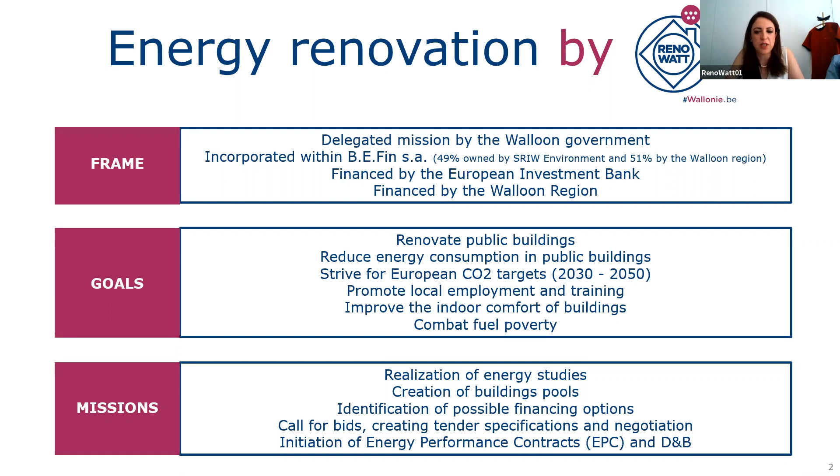Our missions are, thanks to our team, composed of engineers, architects, technicians, jurists, financial specialists, and administrative assistants, together with external officers, we carry out complete renovation studies, starting from building selection till signing energy performance and design and build contracts. We create building pools and identify possible financial options. We also create tender specifications and run the whole process of calling for bids and negotiating the different offers.

Renowatt, being a group purchasing organization, is a one-stop shop that plays the role of a public facilitator between the different parties and through all project steps. Local public authorities get access to our service by signing the adhesion convention.

Afterwards, we select buildings based on heating and power consumption, in addition to heated surface area. We look for funding opportunities, manage the purchasing process, and select the ESCOs, which are the energy service companies.

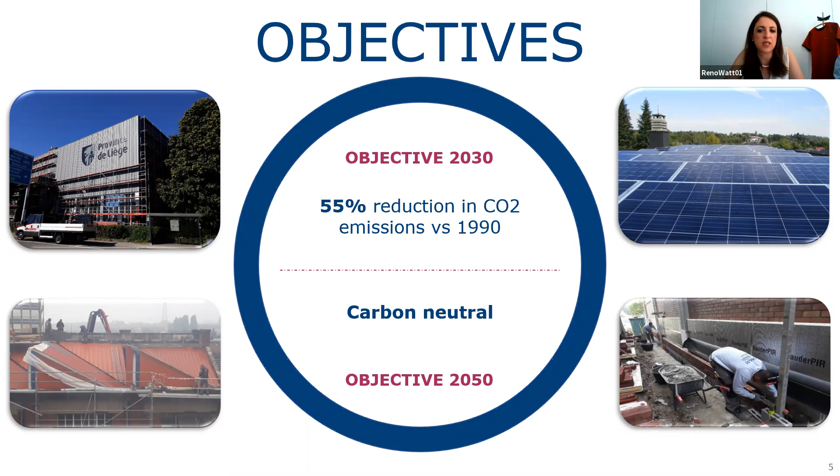Through the different projects on which we work, we try to abide by the European target of reducing carbon emissions by 55% and achieving carbon neutrality as much as possible. In fact, the initial goals of Renowatt have doubled from those initially planned in the contract with the European Investment Bank.

As seen in this table, instead of working on a project for 50 local public authorities, more than 113 local public authorities have joined Renowatt. Therefore, instead of aiming for 104 million euros of investment, we could achieve up to 225 million euros of investment.

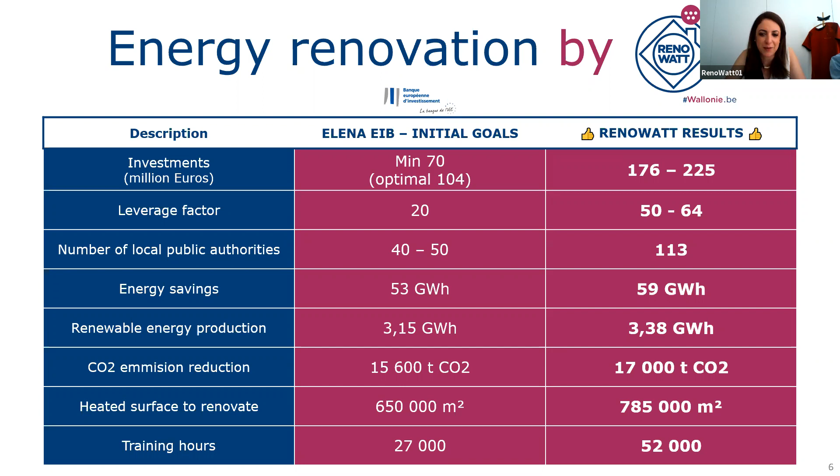I will give the speech to Luc Charlier, and I will be back for the questions.

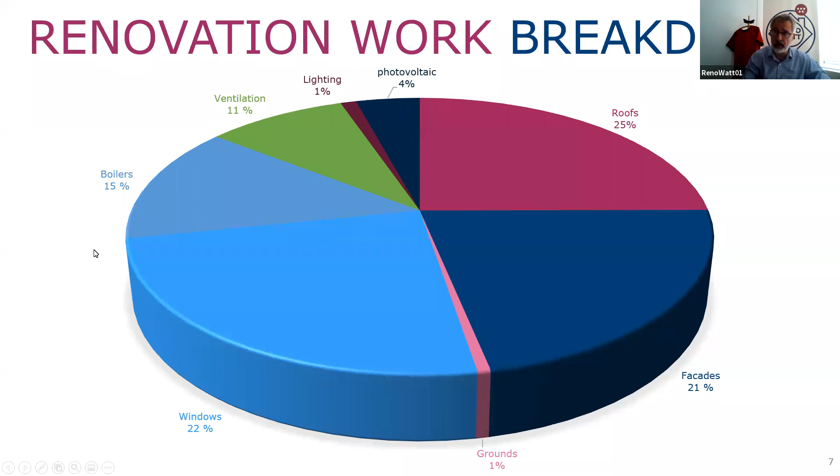Okay. Thank you. Hello. So here you see the type of renovations we do in the buildings. This means we work on the envelope with windows, grounds, facades, roofs, etc. And we work also on systems: boilers, ventilation, lighting, photovoltaics. This means 2/3 of the work is done on envelopes of the buildings.

What is our process? So our process is divided into 6 steps, as shown here. I'm going to go into the 6 detailed steps during the next slides. So first, we make an energy list of the buildings based on global data, which means consumptions and heated square meters of buildings. We have global data, but also more detailed data.

How does it work? Practically, we are going to divide the buildings into 3 categories. First category, buildings with high consumption and high heated surface. And of course, we start with the biggest buildings because we have a lot to do, and there are, of course, more energy gains in this first category.

But we are also going to look at big buildings with lower consumptions. It could be interesting because we could work on system actions like improving regulation, for example. And we do not have to avoid looking at smaller buildings if they have high consumptions, because on small buildings with high consumptions, we of course need to insulate and to work on systems.

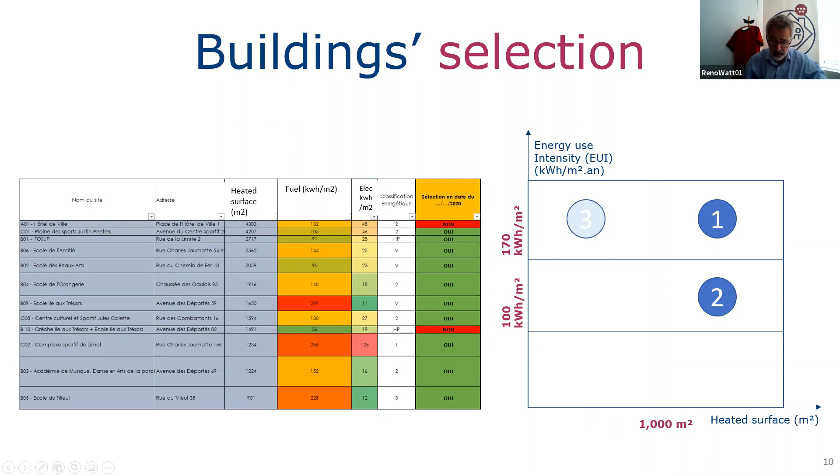This is about global data. Of course, we need to go into more detailed information about previous renovations and all detailed information about the buildings. If we look at the quick scan, what is it? The quick scan is one way to say we do energy audits and analysis.

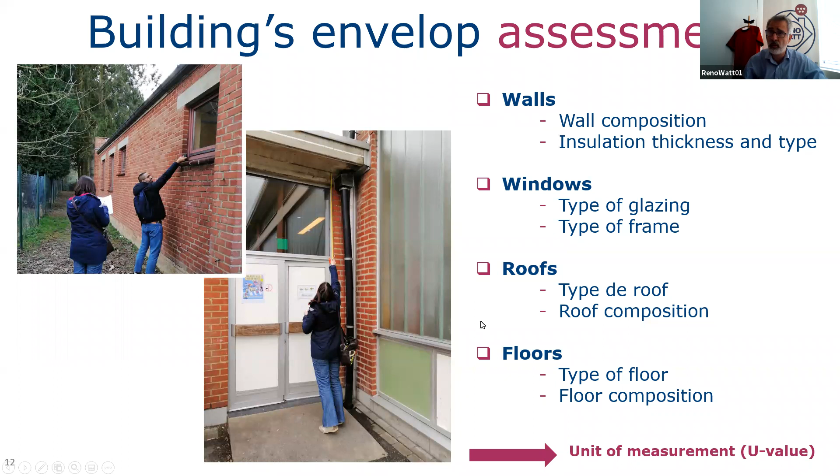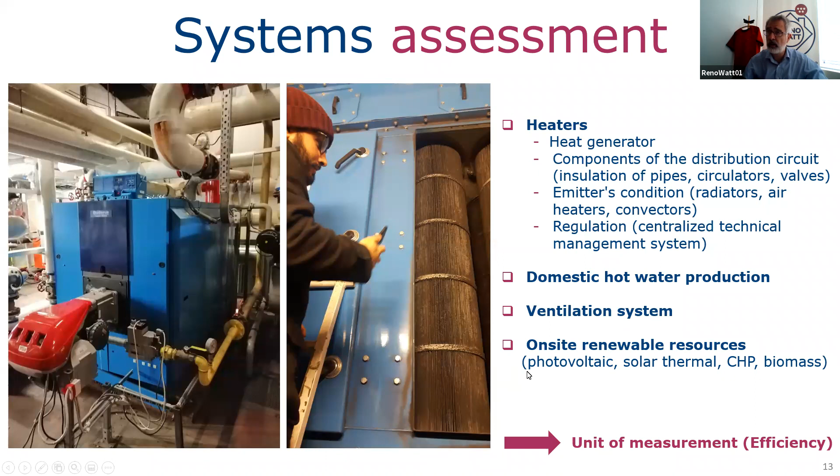So this means we are going to visit the building, check walls, windows, roofs, floor, check systems, of course, heaters, heat generators, water production, ventilation, renewable resources on site. And based on the real building, we are going to make a 3D model because we need to have the proper value of the surfaces.

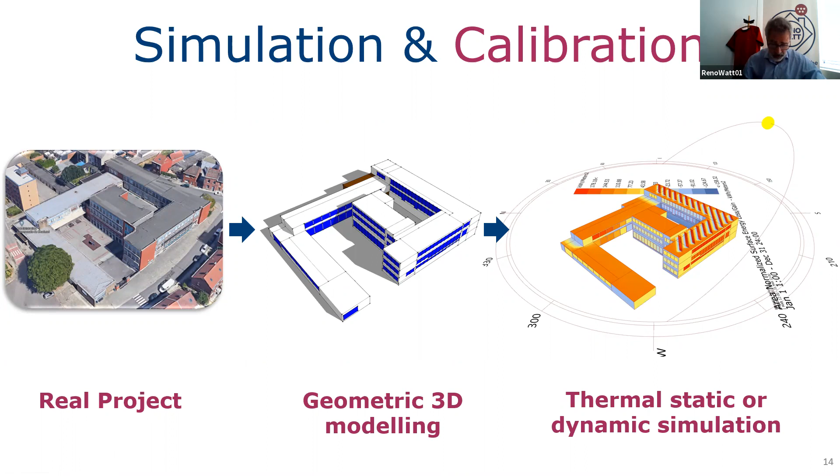We are going to add to each surface the U value, which means the thermal properties of the surfaces, and we are going to simulate the building. Static or dynamic simulation. So when we have a model based on the real consumption and on real temperature in the building, then we are going to be able to calculate how much energy we can gain on the building. So first we calibrate the building.

Why? It's just a way to be able to give a good approximation of the gains. So first calibration and then calculation of gains and costs of improvements.

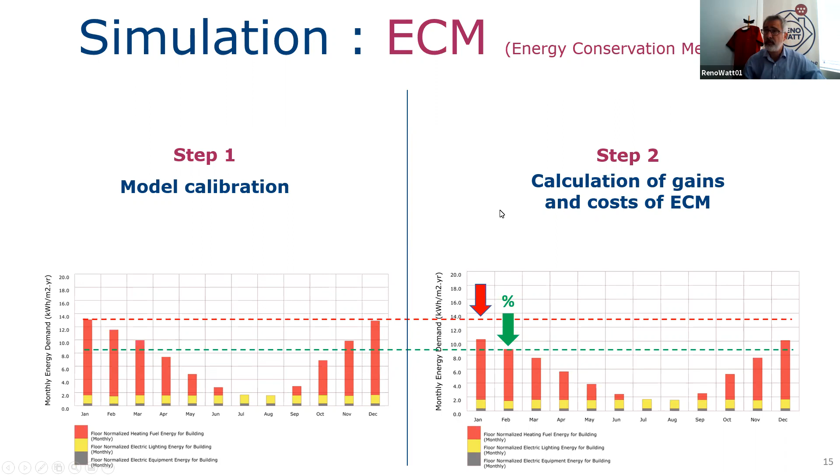What is important also is not only to follow consumption, but to follow and understand temperature in the buildings. So we use the Internet of Things. We place sensors which transfer the temperature in the building every hour. And this gives us a simple way to understand how the building works. So you can see, for example, the decrease of temperature during the night and then during the weekend. And this is important for understanding, of course, whether it's regulated properly or not.

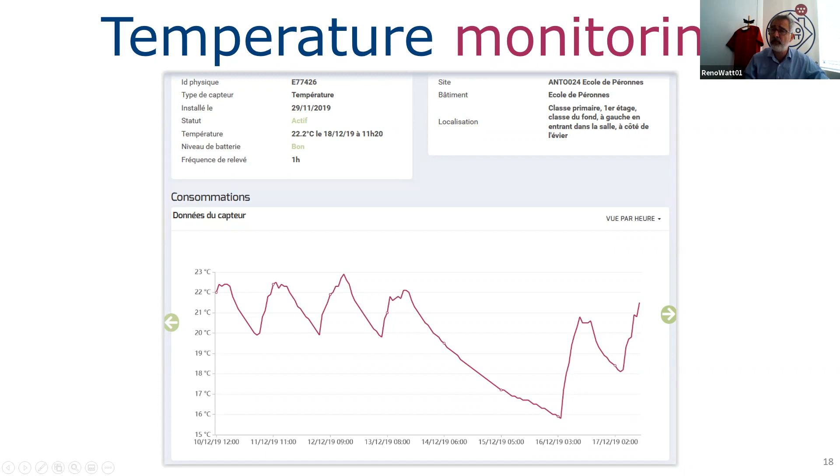We have also a way to calculate the improvement in agreement with M&V, measurement and verification standards, as described by EVO, which is the Efficiency Valuation Organization. We have simple calculation opportunities, just a way to reduce cost of energy, gains year to year.

About financial analysis, step 4. So first we are able to calculate technical gains, and then we transfer technical gains into cost calculations. What do we do? We have the list, of course, of all actions with the cost of each action. We could have, depending on the buildings, big complete actions or smaller actions. We have different options by building. We propose different scenarios to the public sector, so they are able to choose what they want between different proposals.

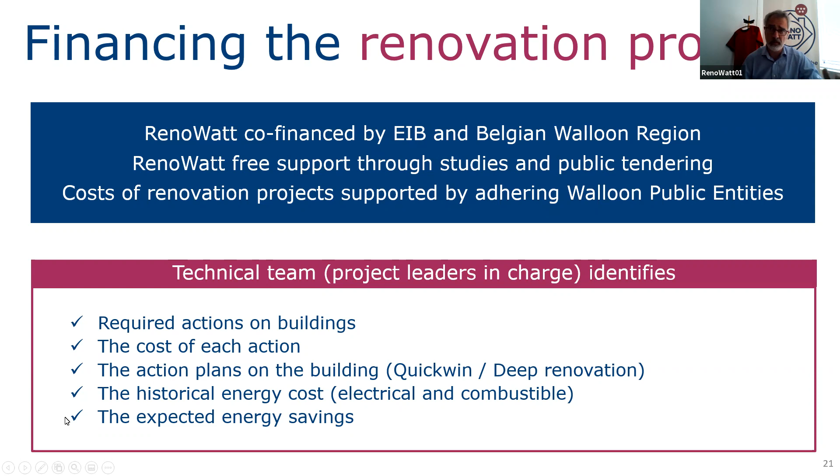We take into account the historical energy cost of the buildings, and we are able to calculate the energy savings compared to the historical costs. So on one side we have the global budget, we have the cost of each action, and we calculate cash flow even on a 20 or 30 year calculation. We have the net present value analysis per site or globally per local authority.

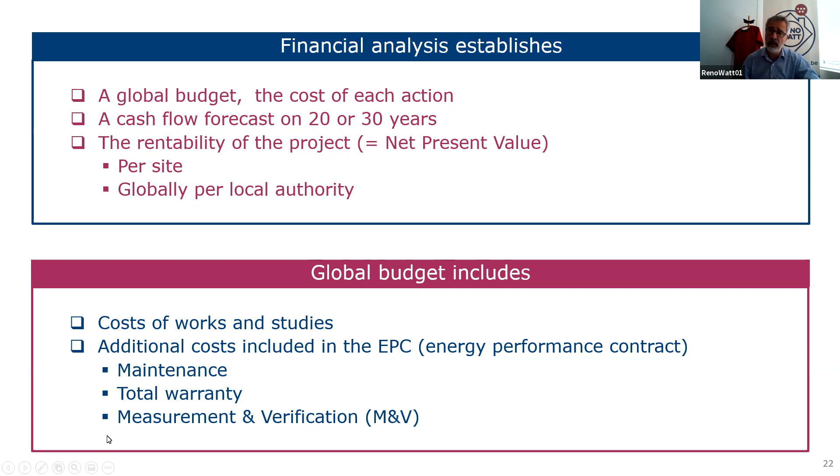Global budgets include costs of works and studies. Not only cost of works, but we have to take care about additional costs which are to be taken into account in the EPC contract, the energy performance contract, because in this contract there are the works, the studies, but also the maintenance, the total warranty, and the cost of measurement and verification, which are typically taken by the ESCO.

So in the financial analysis process, we have the yearly costs. Works are financed by classical bank financing over 15, 20, or 30 years. Yearly costs, yearly gains, comparison between costs and gains. This is practically standard financial analysis. And evolution of cash flow for the public authorities. Of course, we take care about inflation, and how the cost of fuel, electricity, wood, etc. is going to change year by year. And based on the project, we calculate the improvement of cost during 20 or 30 years.

So what is going to happen? This means, based on the project, if we have more insulation or more systems, the energy gains are going to cover between 30% and 40% of the global investment cost.

So practically, of course, there are constraints and difficulties, and there are advantages and opportunities. Constraints and difficulties: public authorities have low budgets, self-financing is impossible, strong dependence on public subsidies, additional costs involved in the EPC contract, this is maintenance and M&V calculation. It's not easy to compare historical and future maintenance costs because of a lack of information on actual historical costs in authorities.

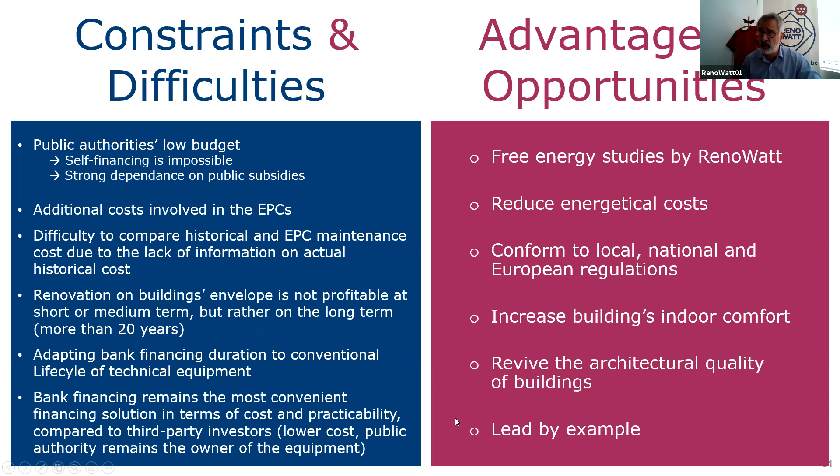About opportunities, the free energy studies by RenoWatt helps the public sector to go ahead. The reduction of energy costs helps global finances. We conform to local, national, and European regulations. We increase the buildings' indoor comfort. We must not forget the increase of heat during the summer. This means we go to more comfort in the summer, more ventilation in the building. We, of course, go for architectural quality improvements, not only energy improvements. And we have to lead by example to show the way to citizens.

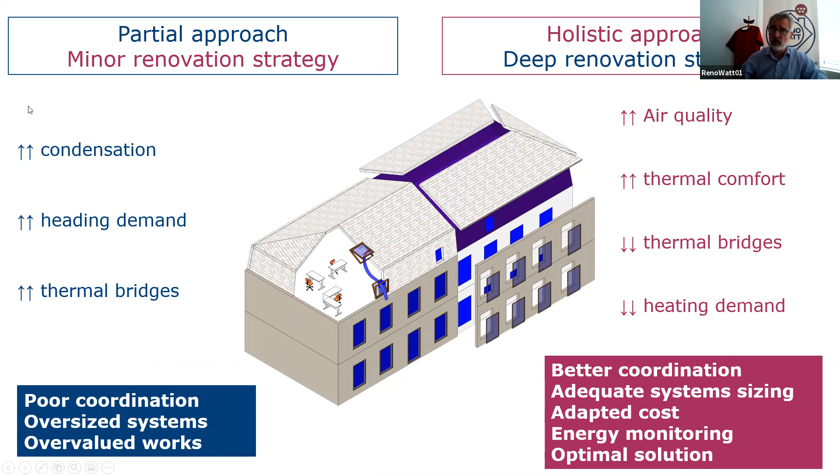Step 5, we have customized solutions for each building. So first we propose different scenarios, and then we have to go to a customized solution. Practically, having a global strategy for the building is the best way to do it. Sometimes we also have to do minor renovation, but we have to take care about being in lock-in situations. So the best way is to check the building globally.

So about guidelines, we are going to work on, in Belgium, PEB requirements. This means for the envelope, 0.24 to 0.15 watts per square meter Kelvin. We propose mineral or bio-based sustainable materials.

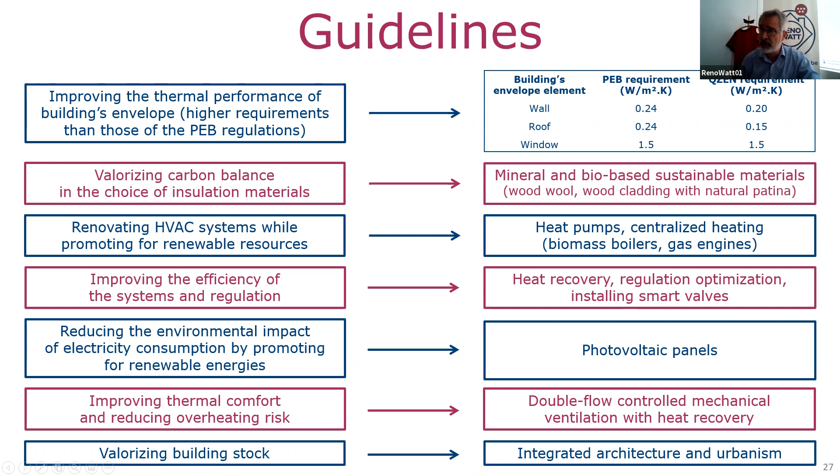We propose heat pumps, centralized heating, biomass boilers, gas engines, all systems which can help reduce CO2, improving the efficiency of the systems and regulation, good gains, photovoltaic panels, and it's important to speak about improvement of ventilation, especially with the coronavirus situation. And of course, integrated architecture and urbanism. So not only energy.

At this time, we are at a step where we are going to launch the contracts. And what do we do? Practically, we launch different types of contracts. So why? Because it's linked to the dimension of the building. So big buildings with big energetic gains, we are going to run long EPC contracts on 15 years, for example. And especially if we have technical buildings, hospitals, swimming pools, homes, this kind of buildings, we go to long EPC contracts of 15 years.

If we have smaller buildings, we also have a shorter EPC contract for 3 or 4 years. This gives us the opportunity to stabilize the building and prove the win, the energy gains. And with this short-term contract, 3 or 4 years, we also have an option for a 15 years follow-up.

And for very small buildings, we are going to run design and build contracts, simply because on small buildings, we do not have enough energy gains to pay for many energy calculations. So it's better to do the action than to spend money on energy follow-up. So we have to adjust the type of contracts with the dimension of the building.

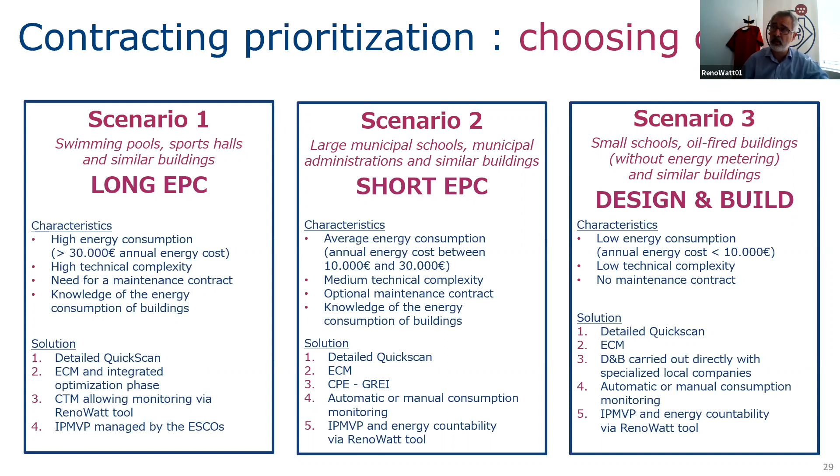Also, we have to take care about the quality of the data. This means if we have poor data about historical consumptions, and especially with fuel boilers, we do not know when the tanks have been filled. This means consumptions per year are not so precise. In these situations it is easier to make design and build contracts and to go to EPC contracts later when we have better precision.

EPC phases: during the 3 or 4 first years, this is our short EPC contract. What is going to happen? So first period, the ESCO company is going to run works on the building. We are going to see a decrease of consumption. And then during the stabilization phase, they are going to prove the energy win during 1 complete year. When they have proven the win, we are okay with a short EPC contract.

When we go to a 15 years contract, we give them the opportunity to make further improvement, because it's not the way to stop improving the building after 3 or 4 years. We have to have ways to improve the consumption during the complete contract, during the 15 years of contract.

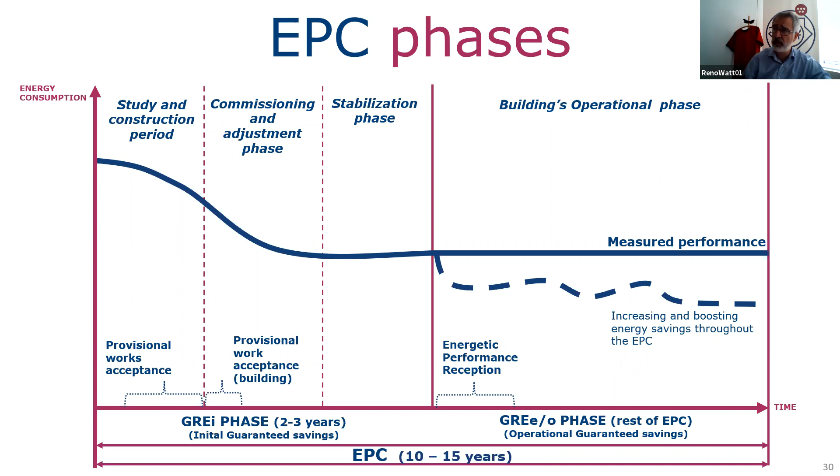About the procedure of the public procurement. So we have a procedure with negotiation. It's very important to have negotiation because it's a complex contract. So it gives us the opportunity to adjust the contract on the best procedure. Without negotiation, it would be a lot more difficult. And we have 2 negotiation phases to have the time to adjust to the best proposals. So it's a negotiation procedure with 2 phases.

So what are the lessons learned by RenoWatt? It's always challenging to convince public authorities to adopt ambitious energy policies, also because today we have the coronavirus problems. We just have to understand the climate problem is the same as the coronavirus problem. We just have to do it, to go through. Detailed energy monitoring and data collection is very important to improve the buildings. First, we have to understand how the buildings work.